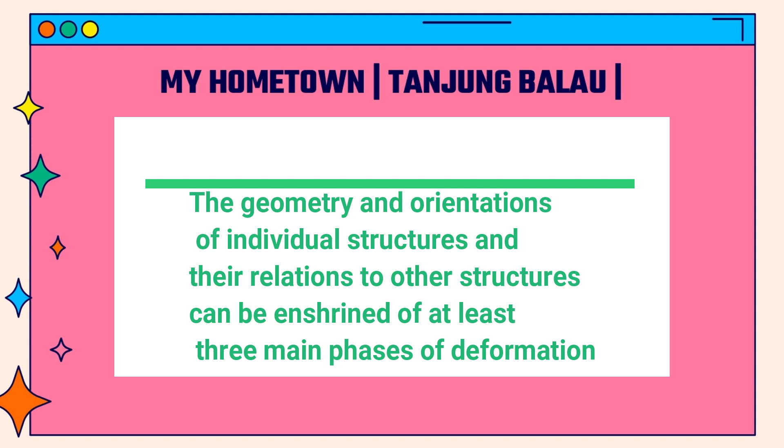The geometry and orientation of individual structures and their relations to other structures indicate at least 3 main phases of deformation. Alright, next is the location. The light blue color is the beach area. We started the tour from Tanjung Lompat to Tanjung Balau. Let's see the real view of the beach at my place.

Alright, let's go. Sandy soil is a soil with a high percentage of sand or large soil particles. It mainly

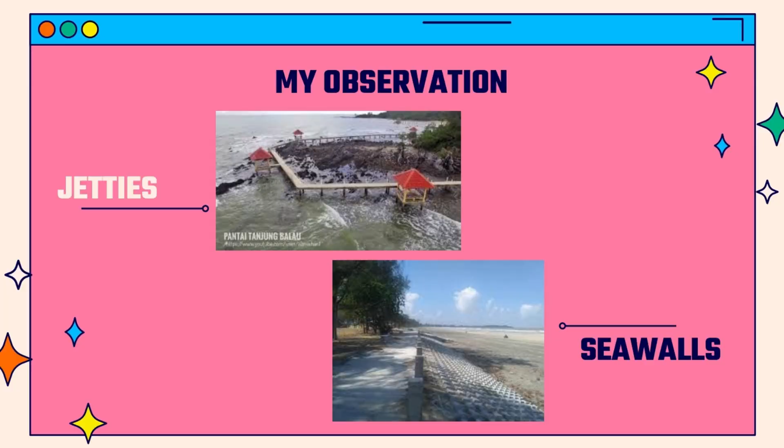For sandy soils, this is the only way to increase the ability to retain water and nutrients. For example, for planting, humus is more effective in the presence of clay. If our soil has very little clay content, we can add some at the same time as the organic matter. Compost, peat moss, well-rotted manure or easily available organic matter are good choices for working into sandy

soils or for mulches. Some mulches decompose slowly, like bark chunks. Rapidly decomposing mulches like compost and manure are more effective at improving the soil.

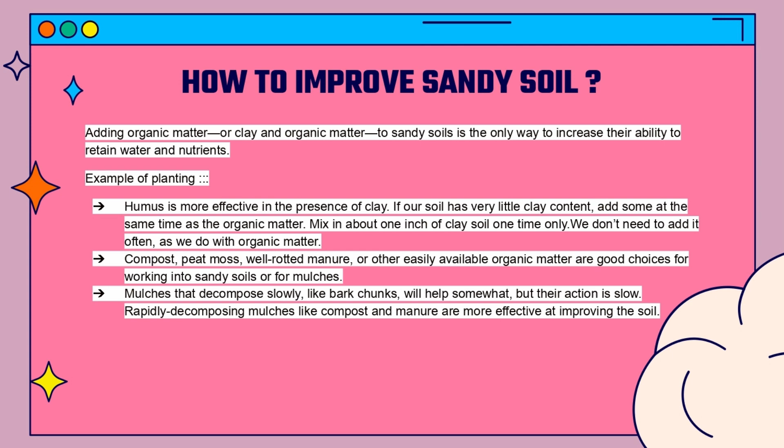Next, let's overview the Pengerang Integrated Petroleum Complex (PIPC). This is a development project in Pengerang. It is one of the largest investments in the Pengerang district, and it is located on a single plot of land measuring about 20,000 acres. Development of the PIPC moves Malaysia's economy and creates huge job opportunities for the nation.

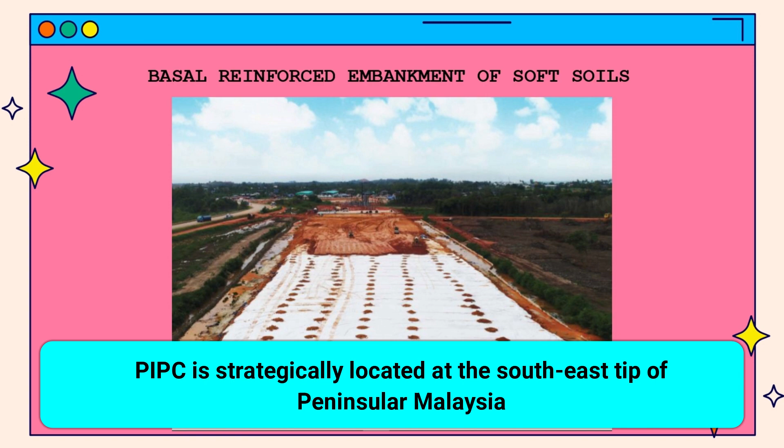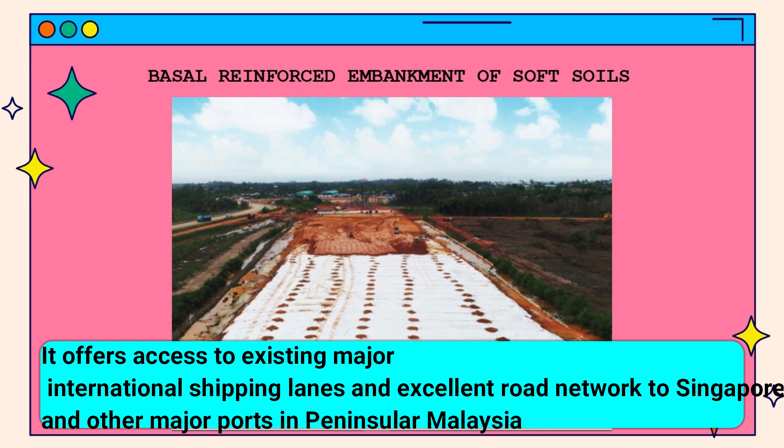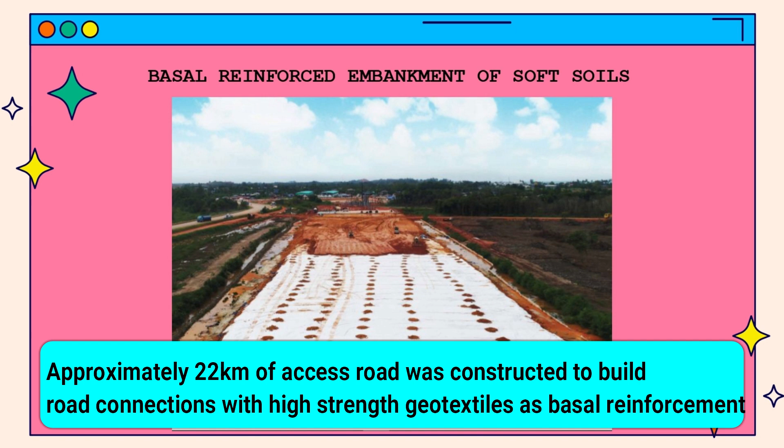As PIPC is strategically located at the southeast tip of Peninsular Malaysia, it offers access to existing major international shipping lanes and an excellent road network to Singapore and other major ports in Peninsular Malaysia. Approximately 22 km of access road was constructed with high-strength geotextile as basal reinforcement to promote a stable embankment and a cost-effective engineering solution.

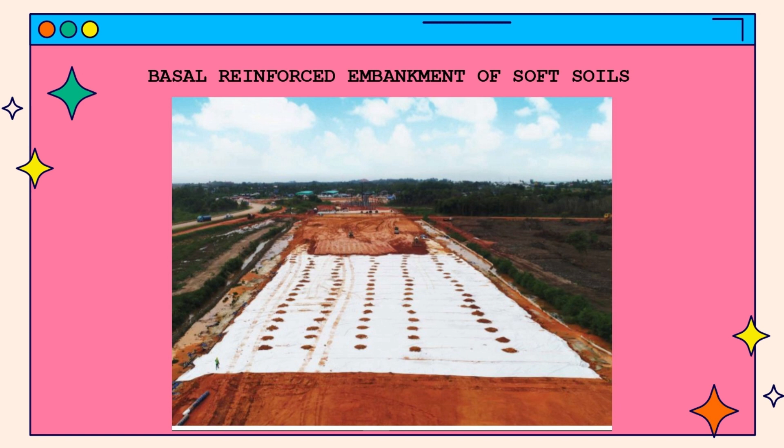The Pengerang site area mainly consists of alluvial soil such as sand, silt, clay and peat. 18 standard penetration tests were carried out at the reinforced embankment access road. Boreholes were drilled down to the hard layer, and SPT readings were collected at every 1.5 meter depth. Based on the soil investigation report, the foundation typically comprises about 4 meters of soft soil, followed by 11 meters of medium stiff silt and subsequently the hard layer.

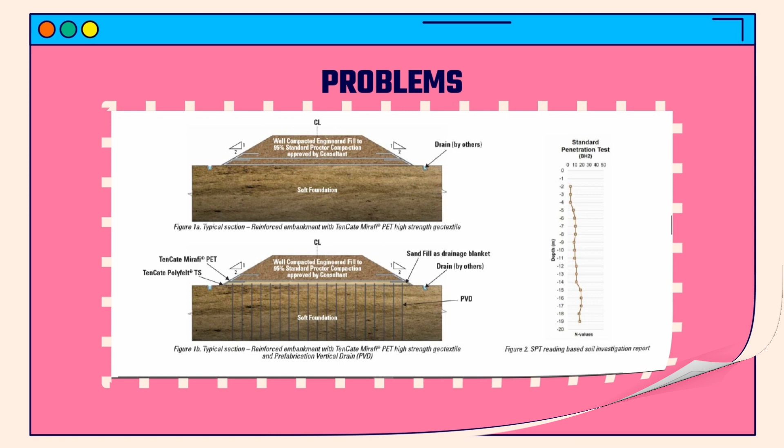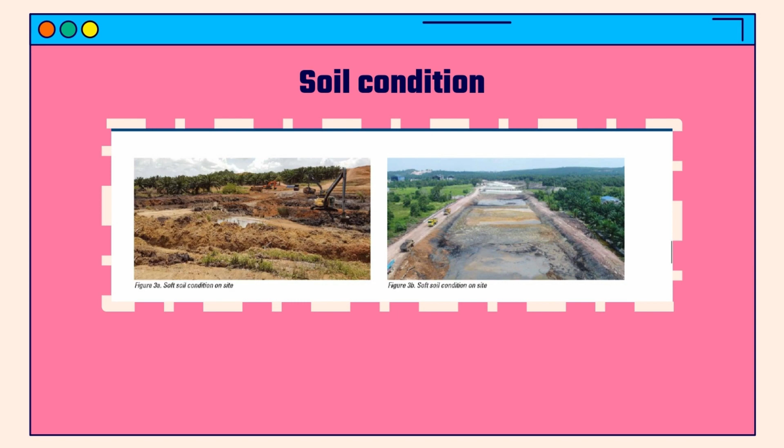Figure 2 shows the results, and figures 3A and 3B show the soft soil condition on site. The top layer of the foundation, with soft high plasticity silt and clay, was unable to support the high road embankment. With a high embankment sitting on a soft ground foundation, proper design is critical in ensuring the stability of the embankment.

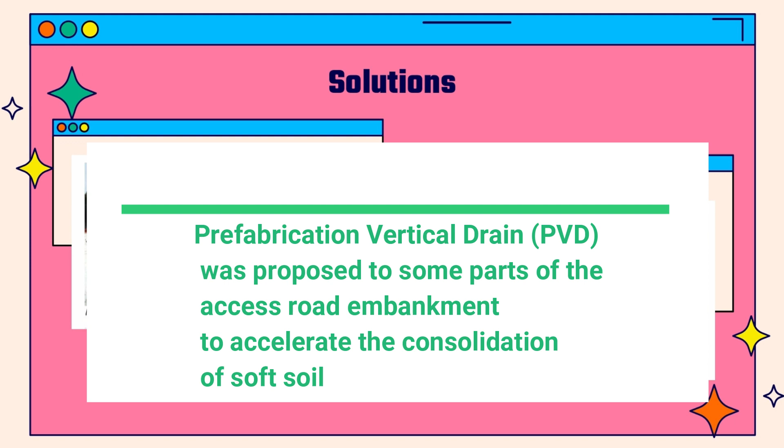Prefabricated vertical drains, or PVD, were proposed for some parts of the access road embankment to accelerate the consolidation of the soft soil. Soft layers such as very soft clay or peat were removed and replaced with engineered fill prior to laying the geotextiles. Large or sharp objects that might puncture or tear the geotextile were also removed. A Polyfelt separator geotextile was also placed on the foundation.

Granular material was backfilled on top of the separator geotextile as a drainage blanket. Subsequently, PVD was installed by vertically vibrating a hollow steel mandrel into the required depth of the soft foundation soil. Figure 4 shows the installation of the PVD. Mirafi PET was laid continuously in the primary machine direction perpendicular to the line of the access road embankment. This is shown in figure 5.

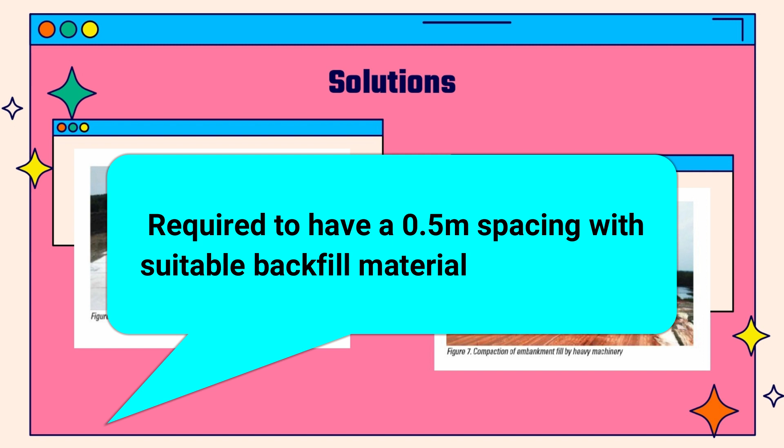The selected engineered backfill was spread out evenly by bulldozer and compacted with heavy machinery until the final design platform level was established as per the construction drawing. We can see this in figures 6 and 7. Embankments with more than one layer of high-strength geotextile were required to have about 0.5 meter spacing, with suitable backfill material placed between each layer of geotextile.

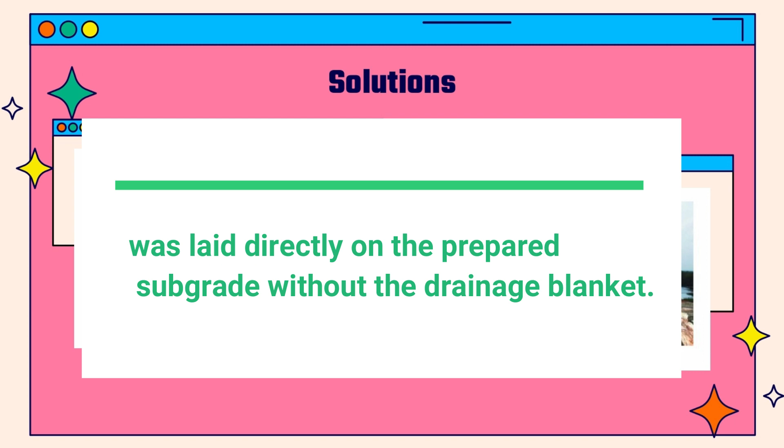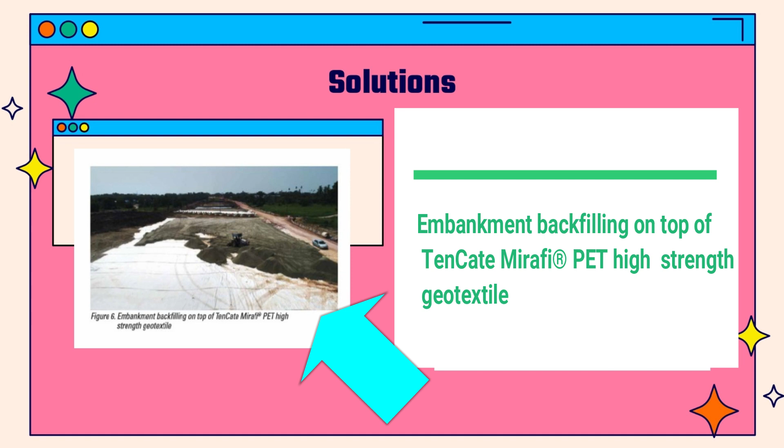In the case of embankments without PVD, Mirafi PET was laid directly on the prepared subgrade without the drainage blanket. Figure 6 shows the embankment backfilling on top of the Mirafi PET high strength geotextile, and figure 7 shows the compaction of the embankment fill by heavy machinery.

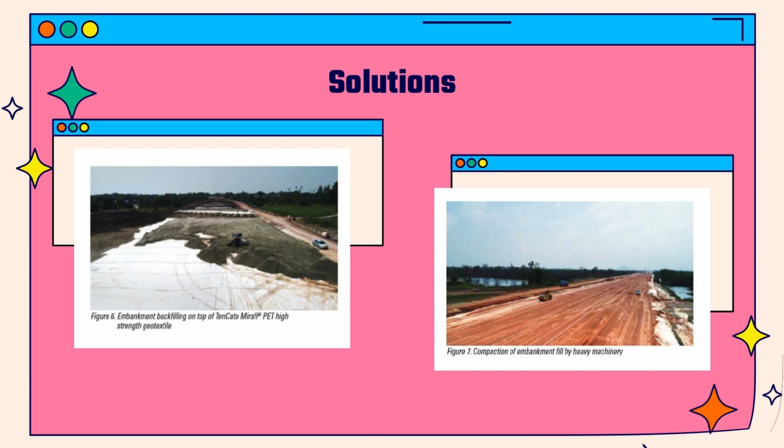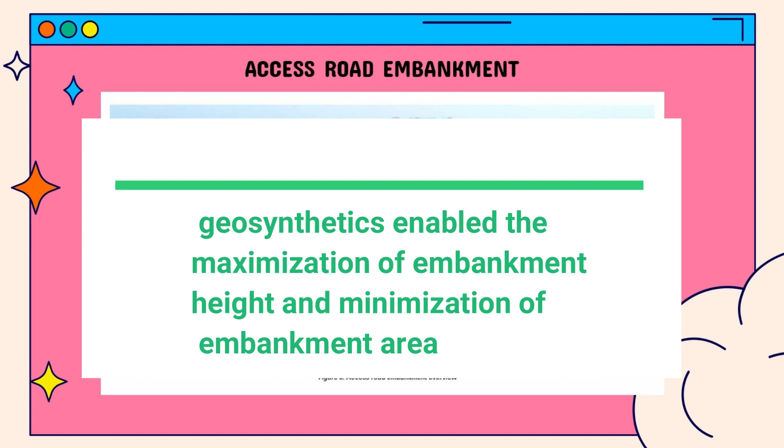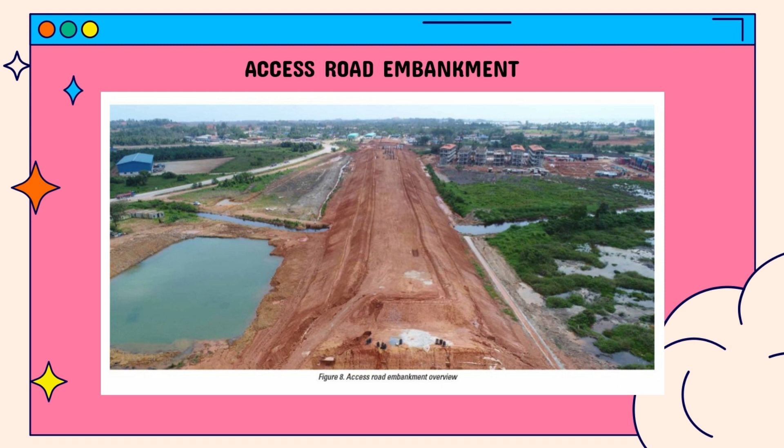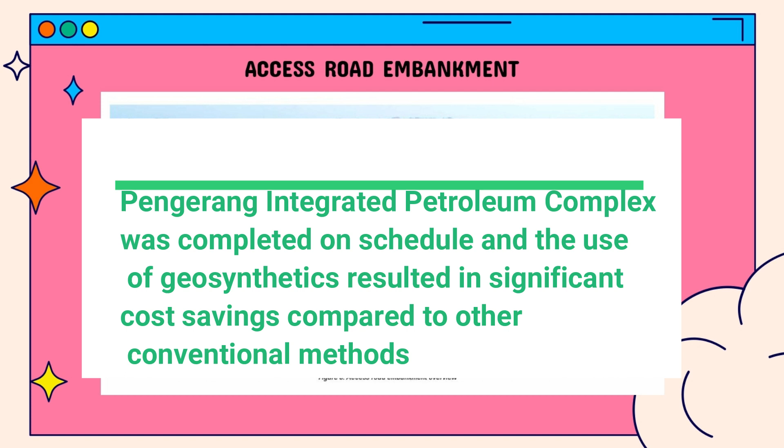So basically, the embankment constructed with basal reinforcement using geosynthetics enables maximization of the embankment height and minimization of the embankment area. The simple installation of geosynthetics allowed construction to be finished within a tight schedule. Basal reinforcement with PVD minimizes settlement and increases the rate of gain in foundation shear strength. Hence, the access road embankment for PIPC was completed on schedule, and the use of geosynthetics resulted in significant cost savings compared to other conventional methods.